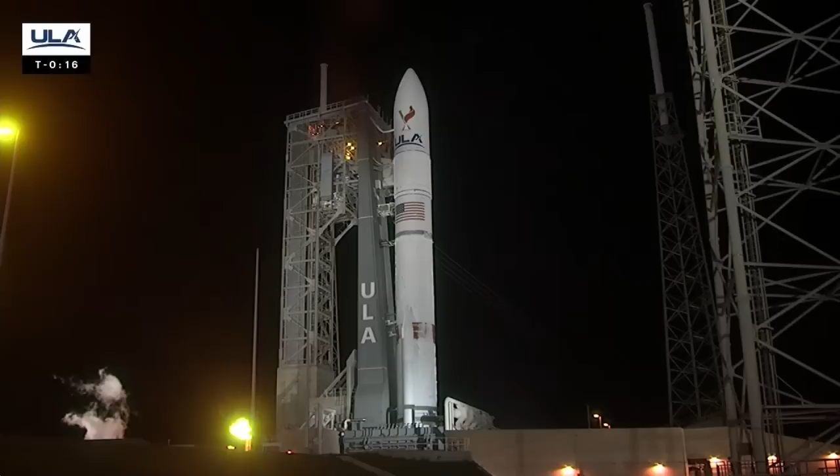Status check. Go Vulcan. Go Centaur. T-minus 10, 9, 8, 7, 6, 5, 4, 3. We have ignition.

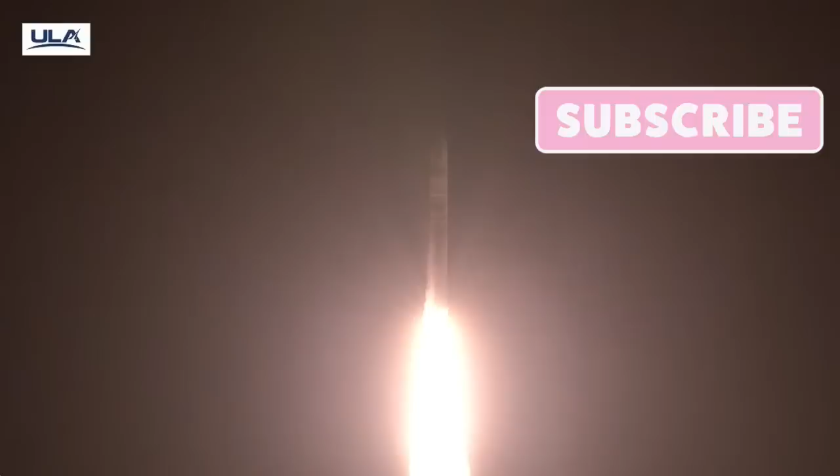Today we are going to discuss the potential of a new rocket system: the Vulcan Centaur rocket system by the United Launch Alliance.

The fuel chosen for the BE-4 is liquefied natural gas. Liquid natural gas is just unrefined methane with a small percentage of other hydrocarbons. Methane is the simplest possible hydrocarbon, having one carbon and 4 hydrogen atoms covalently bonded.

Liquid natural gas is produced from the breakdown of organic matter buried underground. If you have heat and pressure for very long without oxygen, complex molecules will break down to simpler forms over time. Two of these forms on their way to natural gas are coal and oil. Where you have coal or oil, you will have some natural gas. Over enough time, almost all the carbon-rich materials would break down, producing smaller and smaller hydrocarbons, until it was mostly methane.

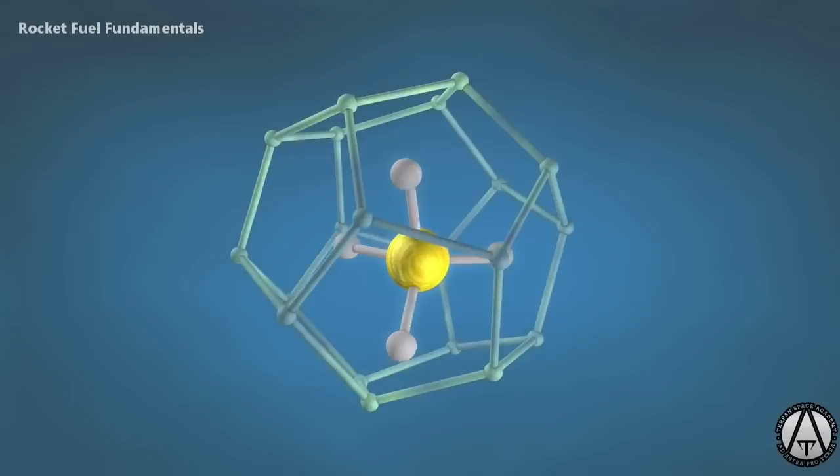Bacteria on Earth and possibly Mars can also produce methane. These bacteria live where there is little to no oxygen, and break down organic matter or other chemicals into what we usually call swamp gas. This is mostly methane. All organic waste can be converted into methane and other biogas, including hydrogen.

This can be done by organisms or chemical processes. While organisms turn complex molecules directly into methane, chemical breakdown is usually a step-by-step process. The next simplest hydrocarbon after methane is ethane. Then propane, butane, pentane, hexane, heptane, and octane.

You may recognize octane. We call this fuel gasoline because a gentleman in London named John Cassell advertised his patent Cazeline oil, which burned bright and brilliant in lanterns, and was cleaner burning than the kerosene fuel that was commonly used in lanterns at the time.

Kerosene produced a lot of soot, but this gasoline made a lot less. When a shopkeeper named Samuel Boyd started using the same name for a liquid fuel he was selling, he received a nasty letter telling him he could not use the trademark name Cazeline. Mr. Boyd changed the C to a G and started selling Gazeline.

By 1863 in Britain, this was called gasoline and spelled this way. And the next year it started being sold in America with a slightly modified spelling. What made gasoline burn cleaner than kerosene?

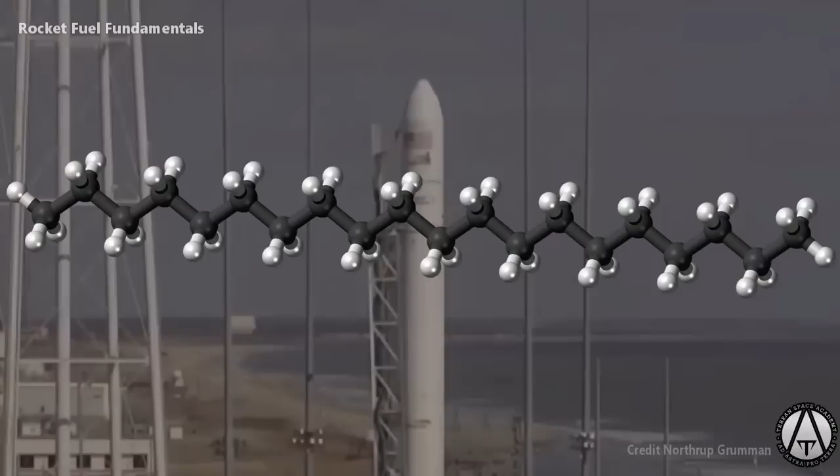This is kerosene. This is what the Falcon 9, Soyuz, Delta III, Atlas, Antares, Astra, Rocket Lab Electron, and Firefly Alpha all burn. Kerosene refined and purified for rocket use is called RP1. Just like purified methane is more predictable but more expensive than natural gas, purified kerosene, with one known molecule, is more predictable but more expensive than plain kerosene.

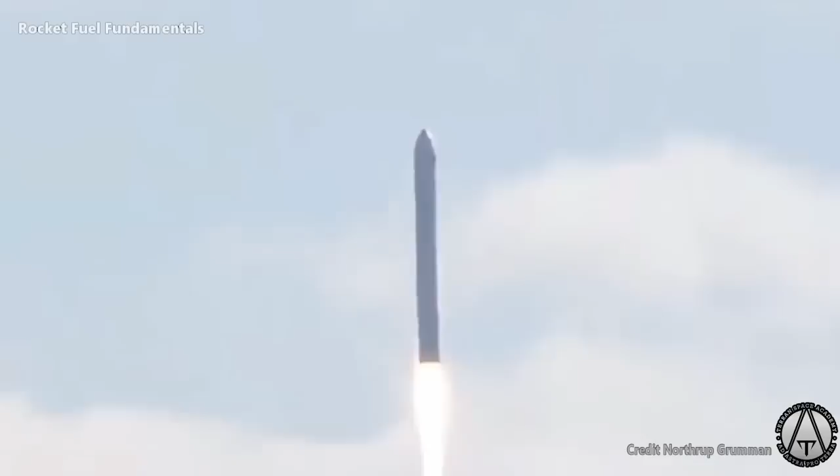But RP1 still burns into many complex products of combustion. From kerosene, you could make lots of breakdown products, and it is very hard to get anything to burn perfectly. The fuel and oxidizer also need to be in the gaseous state for the molecules to mix properly and combust when they go into the combustion chamber.

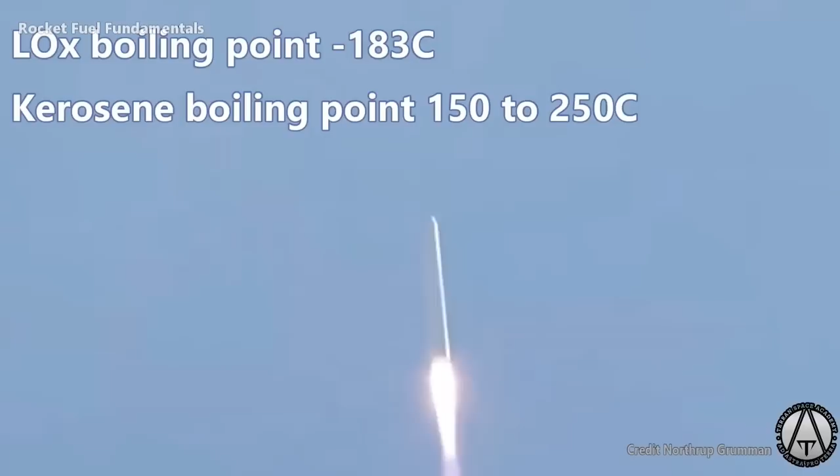Turning into a gas is no problem for liquid oxygen, which has a boiling point of minus 183 Celsius. But kerosene has a boiling point of 150 to 250 Celsius, depending on multiple factors. That means before the RP1 rocket engine is burning, the heat is lower and not much of the RP1 is gas. This makes RP1 rockets harder to start.

The boiling point of methane is minus 161.5 Celsius, much closer to that of liquid oxygen, allowing them to have a common dome.

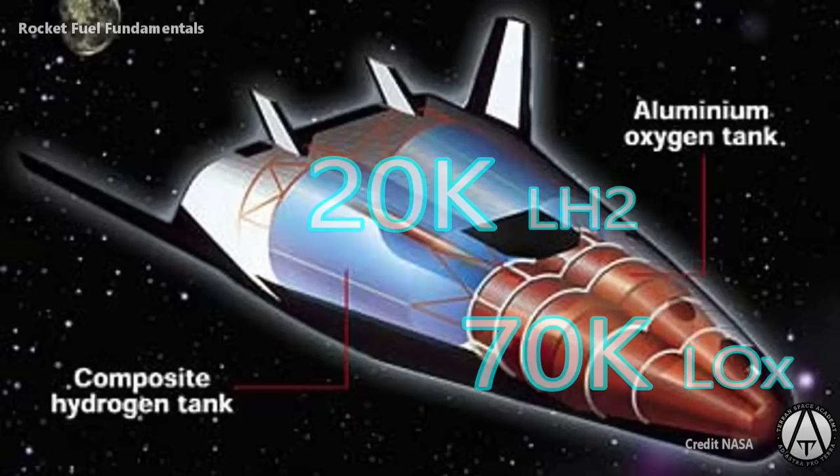Liquid hydrogen is much colder than liquid oxygen, so you need separate tanks or insulation to prevent the oxygen from heating your hydrogen in that case, and causing too much boil-off. Both methane and hydrogen gasify far below room temperature, making combustion of these gases in a rocket engine much easier.

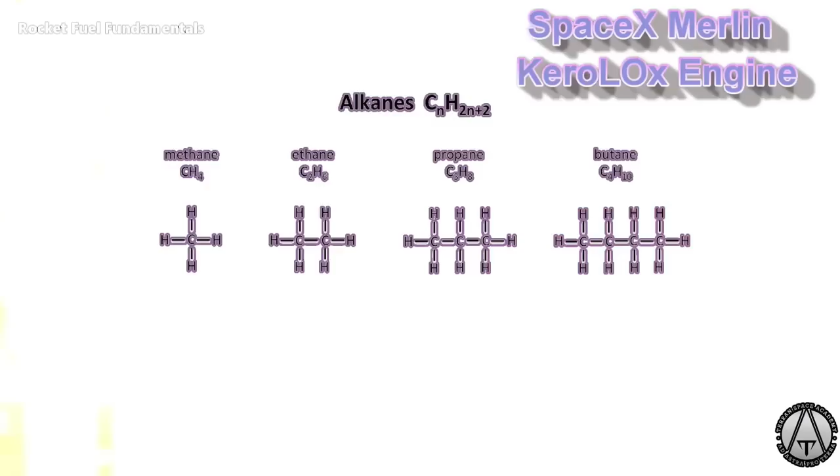Let's look at why this is. It turns out that all of these hydrocarbons stick together, using van der Waals forces, while the hydrocarbons are themselves electrically neutral. When electrons are orbiting two or more atoms, the electron won't be everywhere at once. When its probability wave is distributed more on one side, that side will have a larger negative charge than the other side, which will have a higher positive charge.

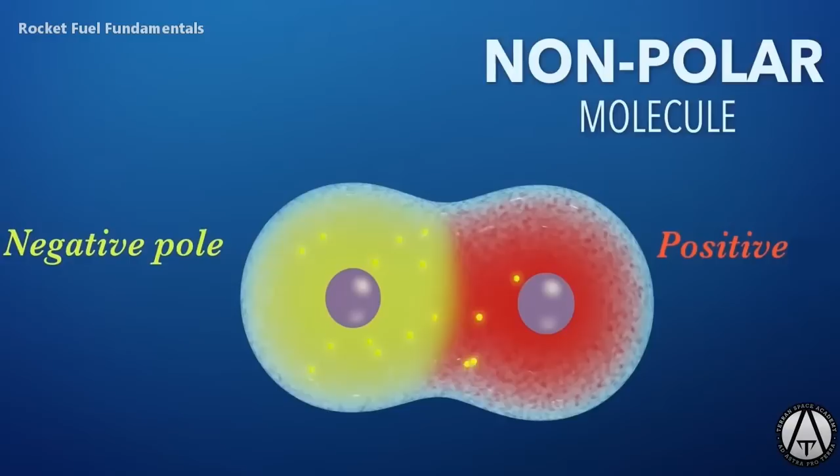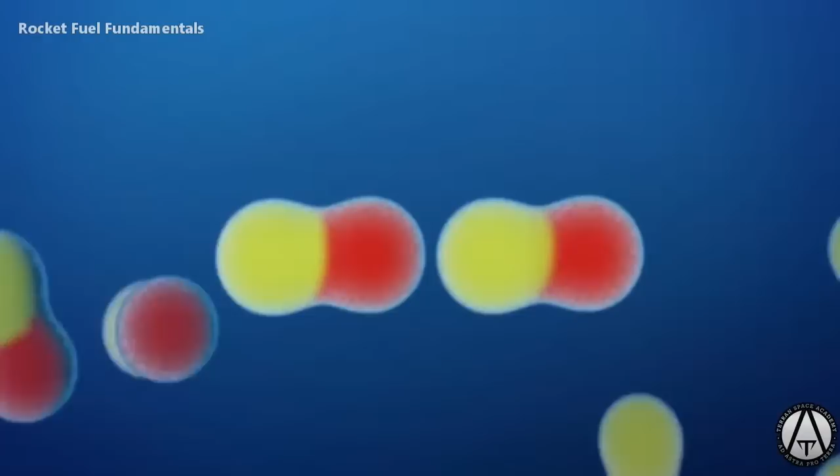If two molecules are next to each other, these very small charges will cause them to briefly attract each other, causing these molecules to stick together like magnets. Since all of these molecules are passing in and out of these phases, van der Waals forces can hold them together. This is a very weak force, but the longer a hydrocarbon molecule is, the stronger this force becomes.

If the molecule is very long, it will become a solid at room temperature and be called wax. As the molecule gets smaller, it will be liquid at room temperature, like gasoline and kerosene. And finally, if the molecule is short enough, it will be a gas at room temperature, like butane, propane, ethane,

and methane. Natural gas was used in public lighting for a long time, and while it burns cleaner than gasoline or kerosene, a gas or cryogenic liquid would be hard to get into your car. So we use the liquids gasoline or kerosene in most of our transportation.

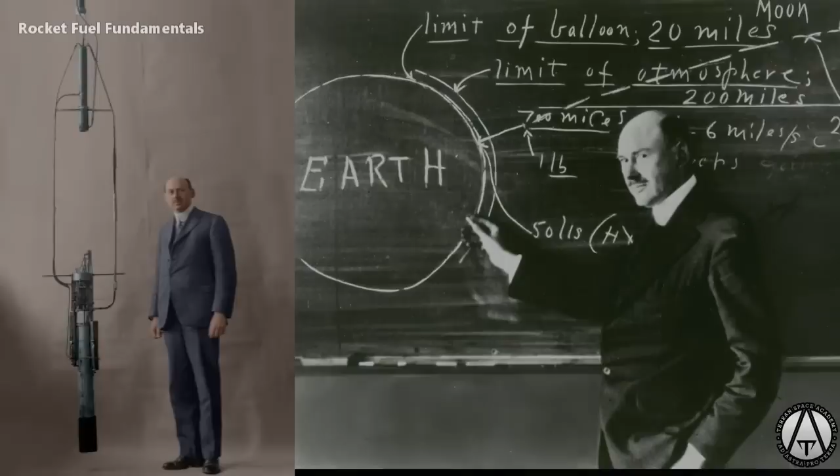There have even been gasoline-fueled rockets. These were built and tested by Robert Goddard himself, the father of American rocketry. And kerosene is used for jet fuel, so it was easily available. Kerosene is denser than gasoline, giving more energy by volume.

Remember that energy density is measured in energy per volume, joules per cubic meter, for example, while specific energy is measured in joules per kilogram. Specific in this context means by mass. Density measures a characteristic, like mass, by volume. So energy density measures the stored energy in a substance by volume.

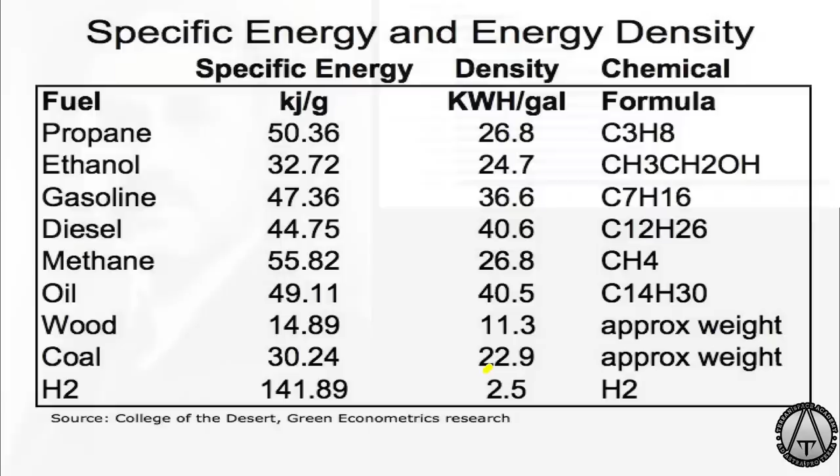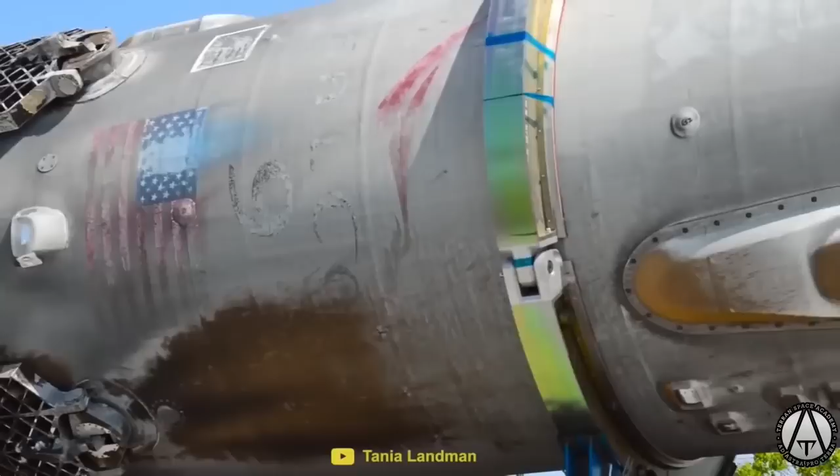Mr. Goddard had stated long ago that while hydrogen had the highest specific energy, measured in joules per kilogram, of any rocket fuel, it also has a very low energy density, measured in joules per unit volume. This means that you need really big tanks if you use hydrogen fuel. Kerosene has a much higher energy density, allowing for smaller tanks. But with its lower specific energy, you don't get as much energy out of each kilogram.

Mr. Goddard thought that methane would be a nice balance between these two. But methane was harder to get and use in his time. Let's look at another quality of kerosene.

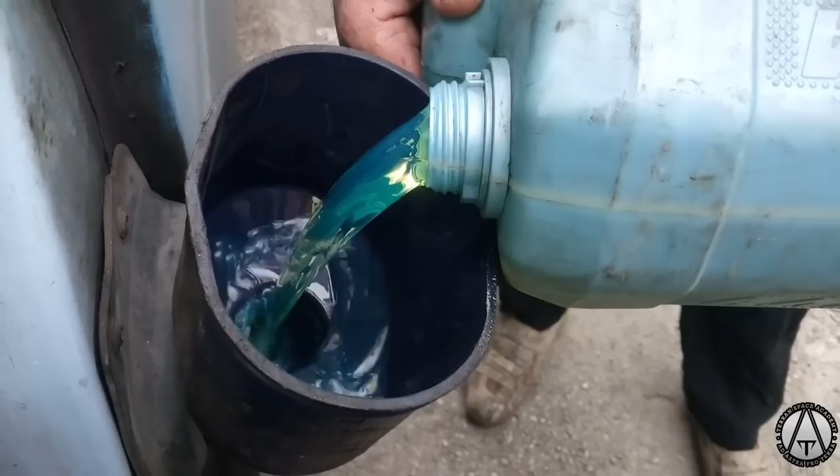Kerosene, with its higher energy density, is both easier to store and easier to pump. A pump can hold a certain volume of liquid at any time. A centrifugal pump spins to move that liquid. The faster it spins, the more liquid it can move.

If you had 3 pumps, all the same size, and spinning the same speed, you could move a lot more kilograms of kerosene than you could the less dense liquid methane or liquid hydrogen. You could spin the methane and hydrogen pumps faster, but pumps have limits to how fast they can spin. These limits have to do with the G-forces produced at the end of the blades.

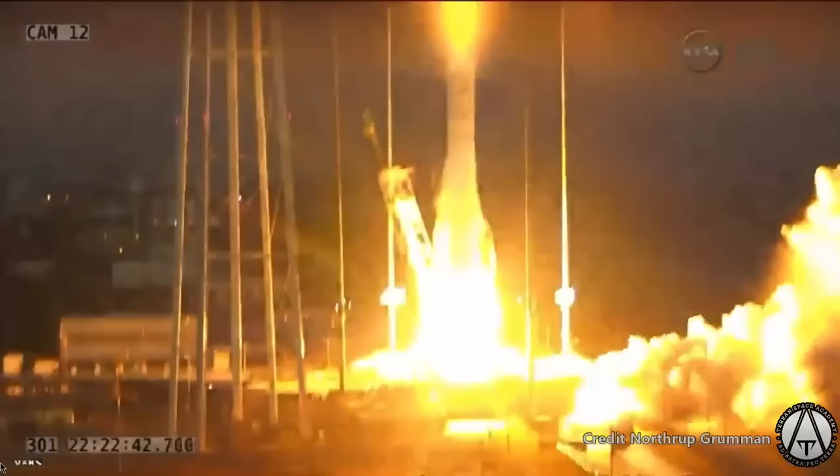These forces can warp or crack blades, causing failures, like in this Antares rocket that exploded shortly after launch, when a turbopump failed and blew itself apart. This is a kerosene or RP-1 explosion.

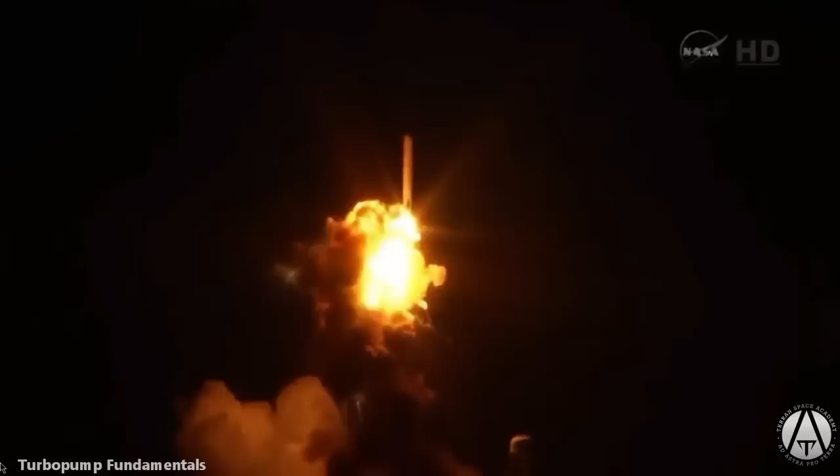In order to pump the same amount of kilograms and not spin too fast, the turbopumps for methane would need to be larger, so they move a greater volume with each rotation. This is how big the turbopump was on the F1 RP-1 burning Saturn V engine. Compare the RP-1 pump to the liquid oxygen pump.

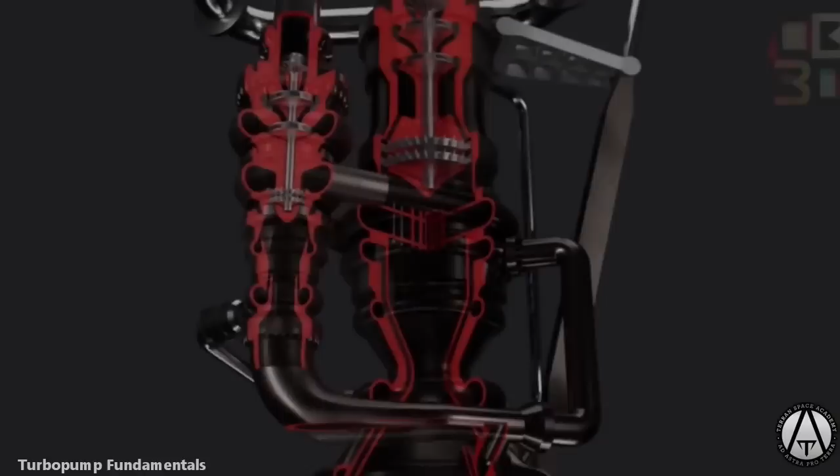Now this is the relative size of the Space Shuttle main engine pumps, burning liquid hydrogen and liquid oxygen. Hydrogen's low density is why this pump had to be so large. Here is the Raptor, showing the relative size of the methane and oxygen pumps. That's one reason why you can't just run methane through a Merlin engine. The engine would be fuel-starved because it was designed to move the more dense RP-1.

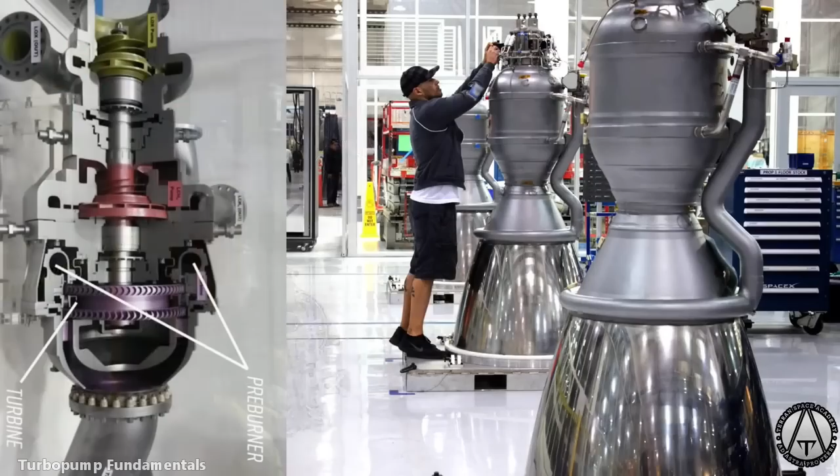There is another issue with RP-1. Due to its higher boiling point, it doesn't turn into a gas and evaporate as easily, reducing explosion risk. But this high boiling point also makes it harder to turn into a gas and ignite, since liquid hydrocarbons can't burn until they turn into a gas.

Gasoline and diesel engines will sometimes have a swirl chamber to heat and gasify the fuel before it is injected into the cylinder for combustion, to increase efficiency and improve ignition. Let's look at ignition briefly.

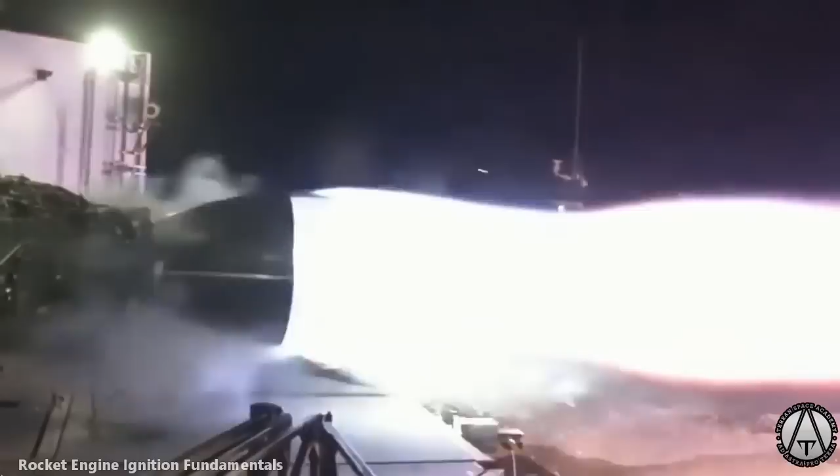For every combination of fuel and oxygen, there is a different temperature of ignition. While a tiny spark might ignite natural gas, it takes a lot of heat to start kerosene burning. If you put diesel fuel in your gasoline engine, it will quit working.

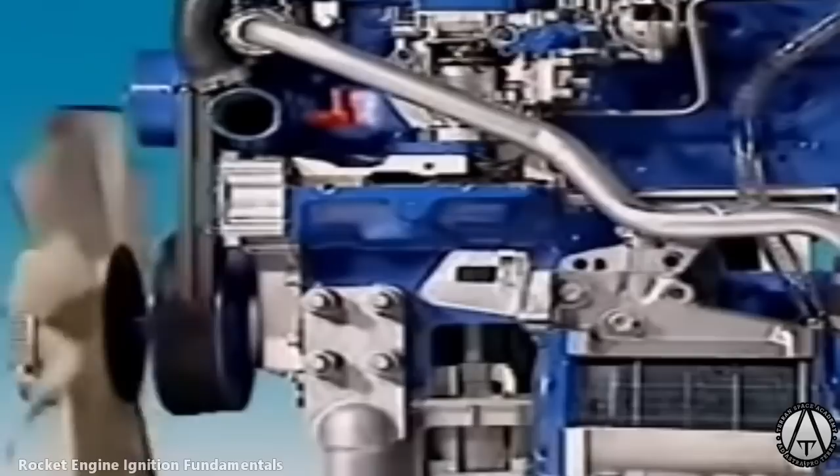This seems strange, since we said that kerosene has more energy per kilogram than gasoline. But kerosene doesn't gasify as easily as gasoline, and a liquid hydrocarbon can extinguish a flame or ignore a spark. The spark plugs in a gasoline engine do not generate enough heat to gasify and ignite diesel kerosene fuel to cause ignition and create combustion.

A diesel engine will use very high compression and glow plugs to get started. Remember that compressing something causes it to heat up. That is why a diesel engine does not have spark plugs. Once the glow plugs help start the engine and get the pistons moving, compression alone is used to heat the fuel and oxygen to combustion, causing it to auto-ignite once the engine is running.

To get RP1 to ignite and combust in a rocket engine, it needs to be started with a very high temperature. Most engines use chemicals that explode on contact with oxygen to light their RP1 engines. There is more on how to light engines in this lesson.

These chemicals are usually triethyl aluminum and triethyl borane, usually abbreviated TEA-TEB. This burns green and is why you see a glow when they start an RP1 engine. Here you see a Falcon 9, a Rocket Lab Electron, and a Firefly Alpha.

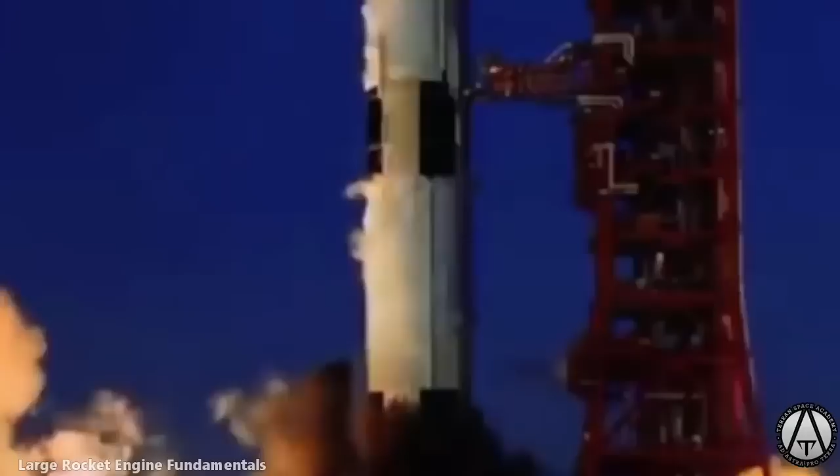The largest RP1 rocket engine ever flown was the F-1 engine by Rocketdyne. Let's look at the development of this engine for a minute. In 1955, the Rocketdyne Company was chosen to start working on a large rocket engine for the Air Force. The Air Force wanted a powerful engine for two-stage ICBMs.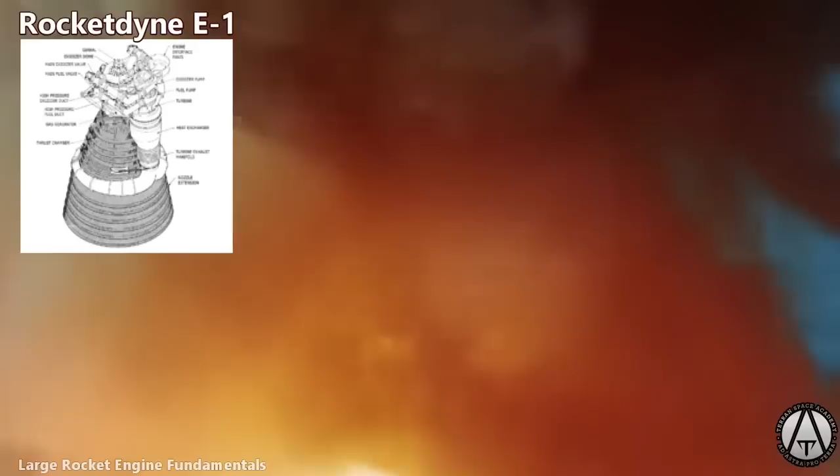The first engine designed was called the E-1 engine. The E-1 was a large RP-1 burning gas generator engine. This engine was built and tested, but like all large engines, it had to contend with combustion instability. When a combustion chamber gets large, there may be areas that burn at different rates. This can cause explosion-like detonations and shockwaves that can damage your engine or blow it apart.

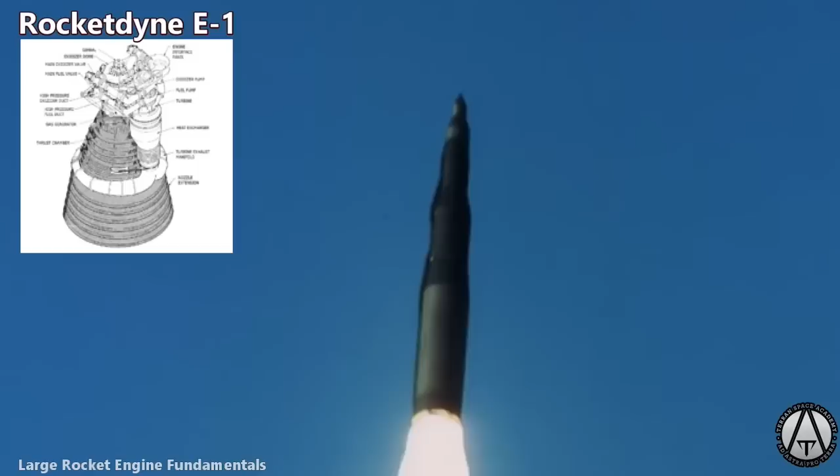While Rocketdyne was trying to solve this issue, Aerojet had designed and tested the LR-87. The LR-87 had two separate turbopumps and combustion chambers, really making it a dual-engine system, but it was considered as a unit, and the Air Force chose it over the E-1 for the Titan missile. The E-1 was shelved, but Wernher von Braun thought that a larger version, the F-1, could be a good choice for a moon rocket, if the combustion instabilities could be solved.

The Soviets had the same problem trying to make large rocket engines, and they had the same solution as Aerojet: make multiple small combustion chambers and nozzles. The RD-170 has one turbopump and 4 combustion chambers and nozzles. The RD-180 is just 2 of these chambers with 1 turbopump. Because they have 1 turbopump, they are considered one engine.

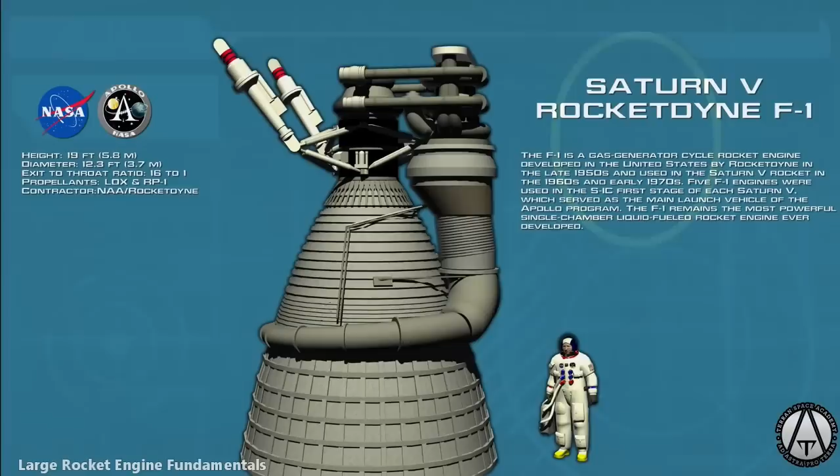For the F-1 engine, Rocketdyne found it could put these dividers into the top of the combustion chamber and solve this problem. Other problems were solved also.

When we burn some fuel in a gas generator to use in the turbopump, we usually keep it fuel-rich, so as not to overheat the preburner and turbine. The exhaust from this preburner can then be fed into the nozzle partway down to protect the nozzle with a cooler layer of gas. You can see this dark gas exiting here on an F-1.

You can also pump fuel around the rocket nozzle to keep it cool. RP-1 can do this for a while, but heating and cooling RP-1 can produce long carbon chains that make plastic-like residue buildup. This is called polymerization. This is not really as much of a problem with methane-based engines.

RP-1 also does not burn completely in a rocket engine and forms soot. This can start to block up the engine and is called coking. This is also not as much of an issue with methane and natural gas.

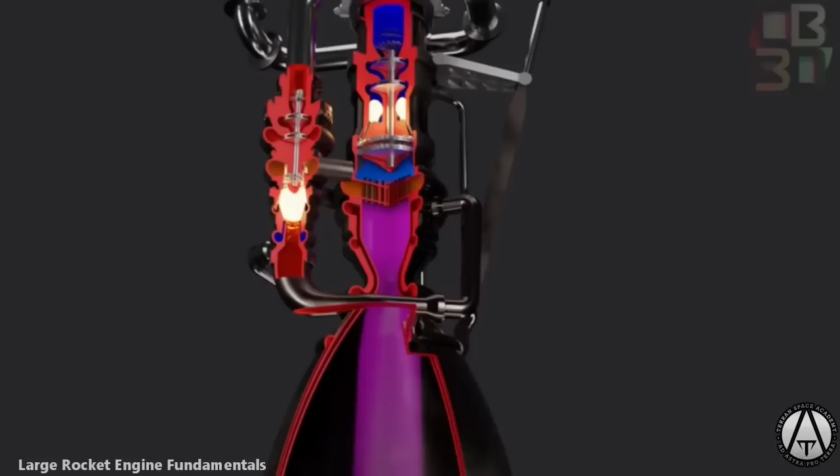But while the RP-1 burning F-1 was not reusable, the RP-1 burning SpaceX Merlin engine is. SpaceX must clean and refurbish the Merlin engines between launches. One of the ways these engines are cleaned is with high-pressure nitrogen gas.

They had been cleaned with alcohol, but alcohol residue had caused an engine shutdown on one flight, and I don't think they use this anymore.

The BE-4 will be using liquid natural gas, which, being mostly methane, burns much cleaner. The BE-4 is a much larger engine than the Raptor. You can see here that the combustion chamber is much larger.

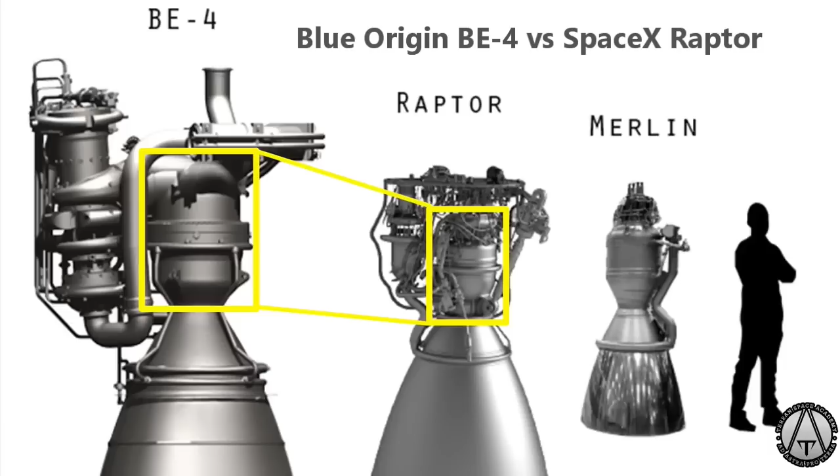It is very likely that early on the BE-4 suffered from combustion instability. If this was one of the problems, we'd have to assume the very smart people working on the BE-4 know about past solutions. Going to multiple combustion chambers would mean starting over completely. So whether they use dividers or some other solution, I don't think this would hold the engineers back long.

Why doesn't the Raptor have this problem? Because SpaceX went a different route. The Raptor combustion chamber is much smaller than the BE-4's. And while the BE-4 is supposed to be more powerful than the Raptor 2, at 230 tons of thrust, it's very close to the 240 tons that the Blue Engine 4 is supposed to produce. How is this possible? Let's look at what's the same and what's different on these engines.

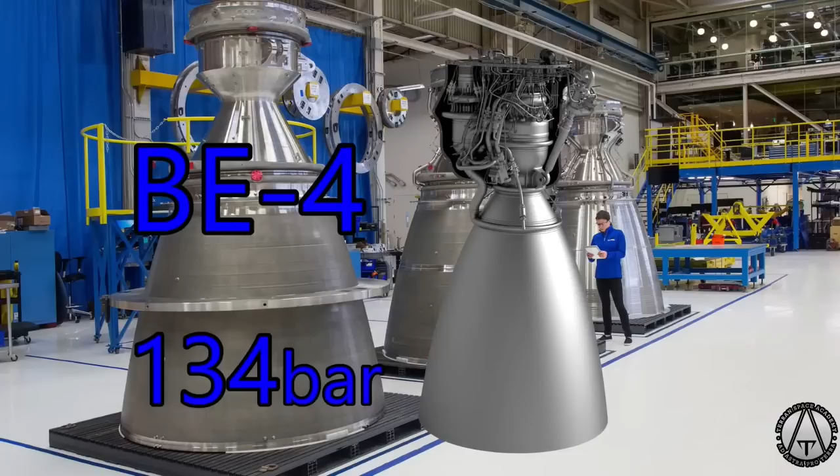Both these engines are burning methane-based fuel. But while the BE-4 has a large combustion chamber, running at about 134 bar, the Raptor, despite its smaller combustion chamber volume, is running at more than twice that, 300 bar, and has been tested to 330. By using extreme pressure, you can make your engine more efficient.

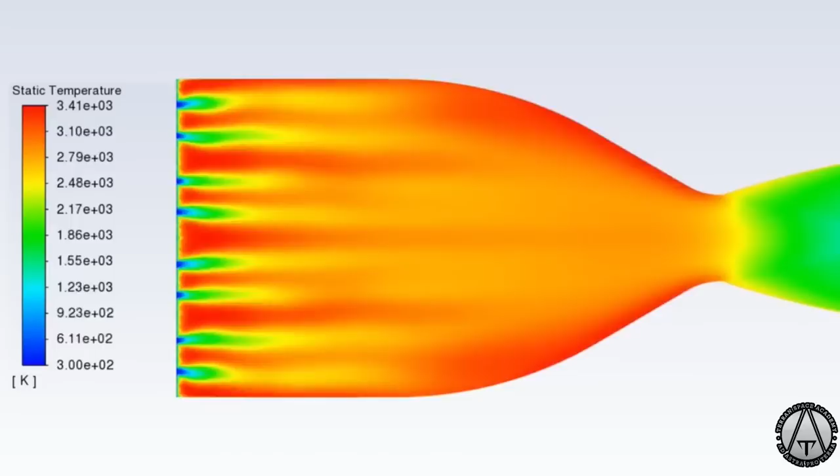Just like the diesel car engine, compression improves combustion because it squeezes the reacting gas molecules together, making it easier for them to react. This reduces residence time. Residence time is how long the propellant must be in the combustion chamber to have time to react and combust. A shorter residence time means you can pump the propellant through at a much faster rate and still get near complete combustion. Why didn't everyone do this?

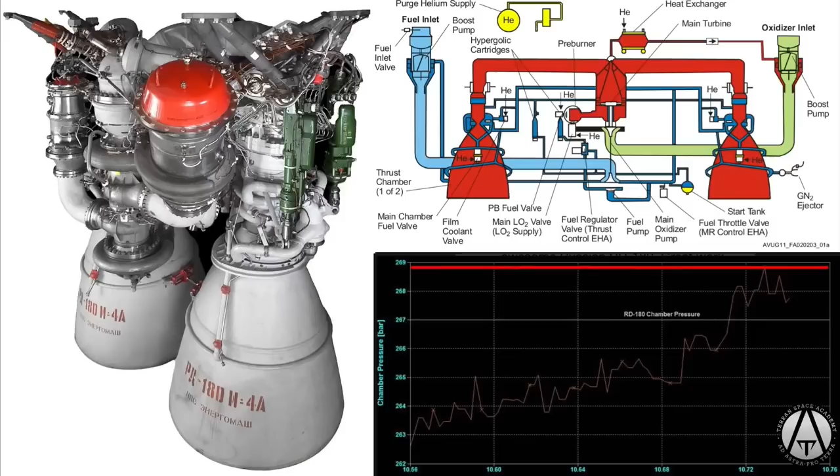Because you'll blow your combustion chamber apart. The highest combustion chamber pressure of any rocket engine before the Raptor was set by the RD-180, and stood for half a century. To accomplish this, the Soviets developed special alloys that could withstand the heat and pressure. SpaceX improved on these, while Blue Origin used an F1-type large, lower-pressure combustion chamber. SpaceX adopted the high chamber pressure approach.

In fact, the chamber and nozzle mass, without turbopumps, of the BE-4 and the Raptor 2, as seen here, are 851 kilograms versus 852 kilograms. How can a much smaller combustion chamber, with a slightly smaller bell nozzle, have as much mass as a much larger one? This one must have a much thicker chamber wall, so it can withstand the ultra-high pressures. A smaller combustion chamber with very high pressure will have a lot less problem with combustion instability and a shorter residence time, allowing propellant to be pumped through faster, increasing thrust.

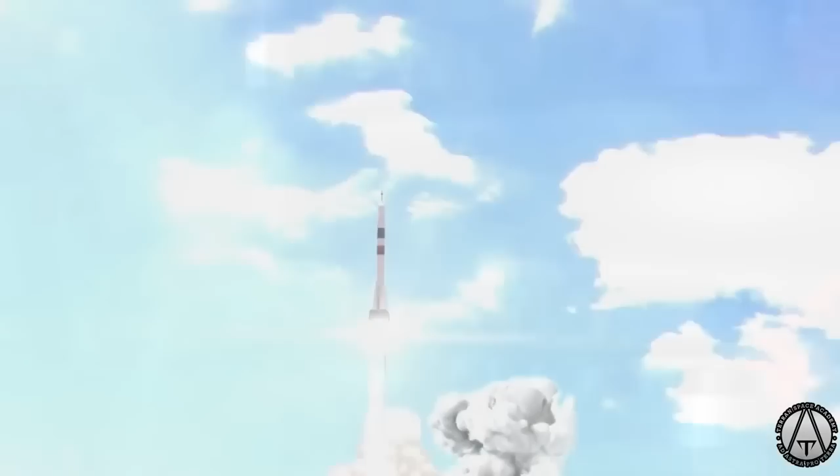And that brings us to the other possible issue. Both of these engines, of course, use turbopump systems. Nothing else can produce the power needed to pump propellant at these rates and pressures. Blue Origin adopted the RD-180 pump cycle, using a single oxygen-rich preburner and a single turbine. This is a staged combustion engine. This worked great for the smaller RD-180.

The Raptor instead uses two preburners, one oxygen-rich for the oxygen side and one fuel-rich for the fuel side. This is called full-flow staged combustion. The Blue Origin turbopump uses just one oxygen-rich preburner to power this one massive pump that moves both the oxygen and the fuel into the combustion chamber.

Now, single turbopumps can be this big. Here is one from the F1 again, but the F1 was pumping kerosene. A methane turbopump the same size would need to spin much faster. And the F1 preburner was fuel-rich, keeping it cool.

The BE-4 is oxygen-rich. Increasing the power in the BE-4 preburner will create tremendous heat and oxidation stress on the turbine blades. You can quickly see that this one pump must work much harder to move an adequate amount of propellant than these two pumps.

To get high performance out of this large turbopump, the conditions here will be much more extreme than what the Raptor turbopumps experience. All preburners are small combustion chambers, with all the same pressure limitations and cooling problems. The Raptor pumps are being constantly bathed in cold methane and liquid oxygen, allowing them to run at a lower temperature. The BE-4 turbine is not. Overheated metal breaks down much more quickly than properly cooled metal.

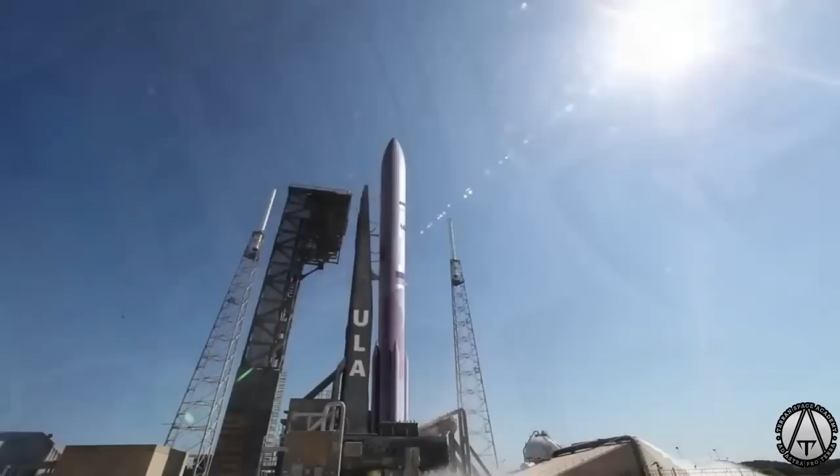Though they may be able to get it to work for a single flight, possibly saving the Vulcan rocket, which is not reusable, I don't think they will easily be able to reuse the BE-4 with this design. And the BE-4 is supposed to be a reusable rocket engine. It is supposed to power the New Glenn through multiple launches and landings. But for a rocket engine to be reusable, you don't want to overstress any components. That is why the Archimedes engine, being designed by Rocket Lab, will not have any extreme performance parameters.

The Vulcan rocket is 200 feet tall and 18 feet in diameter, that's 61 by 5.4 meters for the rest of the world. This is not as tall as the SpaceX Falcon 9, which is 70 meters tall, but it is wider. This gives Vulcan a higher volume than the Falcon 9.

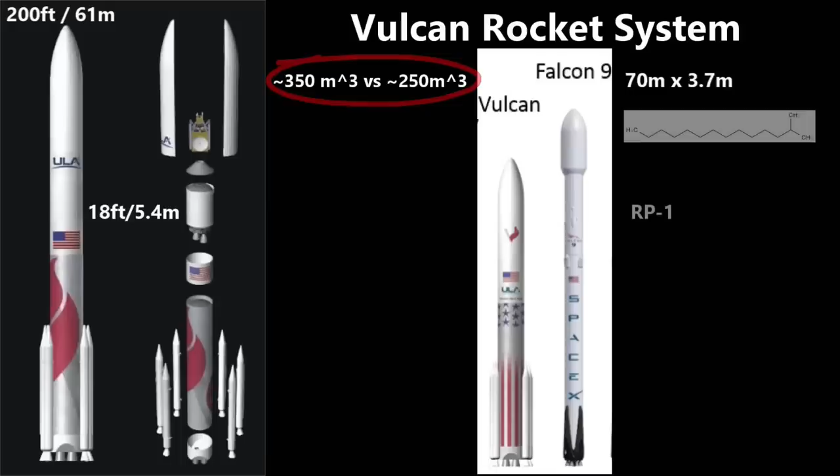The Falcon 9 uses RP-1 for fuel and liquid oxygen for an oxidizer. The Vulcan uses liquid methane and liquid oxygen on the first stage, then liquid hydrogen and liquid oxygen on the Centaur second stage. There will also be the option to add solid rocket propellant boosters to the Vulcan. It can have 0, 2, 4, or 6 of these.

Each SRB can produce a little more than 2,200 kilonewtons of force, burning hydroxyl-terminated polybutadiene that works as a binder and fuel, combined with ammonium perchlorate as an oxidizer, and powdered aluminum both as fuel and to help retain and concentrate heat.

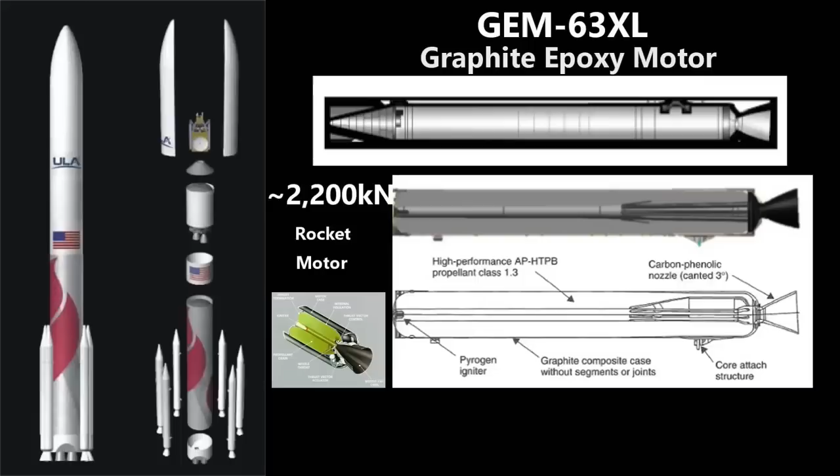This propellant burns through a GEM-63XL rocket motor. GEM stands for Graphite Epoxy Motor. Graphite epoxy is the lightweight composite used for the booster structure. You can learn more about aerospace composites in this lesson.

It is traditional, by the way, to call a solid rocket system a motor rather than an engine. The GEM-63XL was developed by Northrop Grumman and is an extended version of the older GEM-63, first developed by Orbital ATK. The GEM-63XL is currently the world's largest single-piece solid rocket motor.

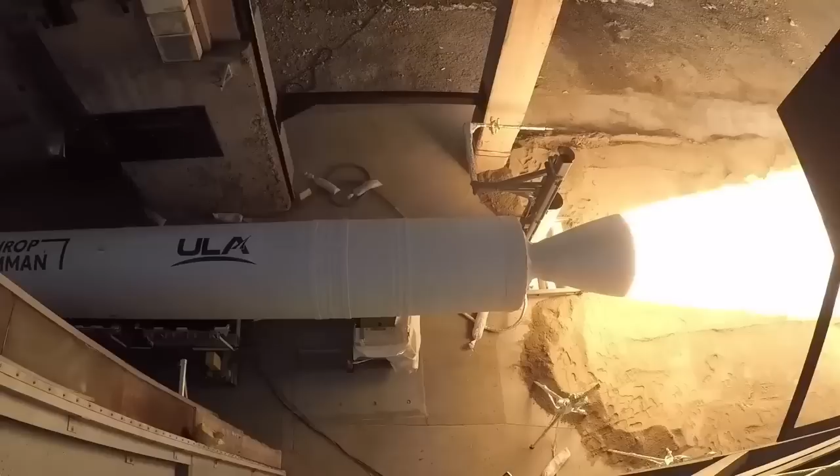It will be 22 meters long and 1.61 meters in diameter. This makes it taller and wider than a Rocket Lab Electron rocket.

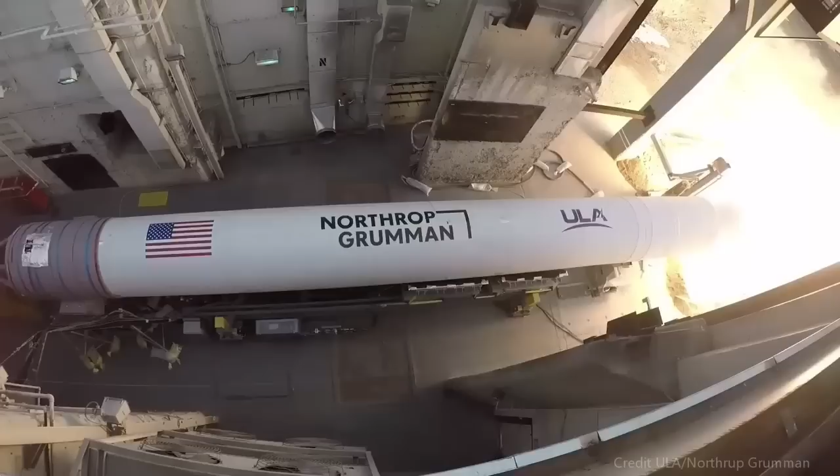Each booster will have a propellant mass of 48,000 kilograms and will burn all of this in the first 84 seconds of flight. We can divide the propellant mass by the burn time, 48,000 kilograms divided by 84 seconds, to get a propellant mass flow of 571 kilograms per second.

But this is the average propellant flow. As a solid rocket motor burns, the geometry of the thrust core changes. This geometry can be designed to create a high thrust start and a low thrust finish, to keep the rocket from experiencing too much G-force.

We can find the maximum propellant mass flow if we want to. We know that we can convert specific impulse to exhaust velocity. The specific impulse of the booster is given as 280 seconds. In vacuum, a specific impulse of 280 seconds multiplied by the force of gravity on Earth, 9.807 meters per second squared, gives us an exhaust velocity of 2,746 meters per second.

The maximum thrust of the GEM-63XL was given as 2,200 kilonewtons. We know that thrust equals exhaust velocity times mass propellant flow, and we can switch that around to mass propellant flow equals thrust divided by exhaust velocity. That would be 2,200,000 newtons divided by 2,746 meters per second, giving us a maximum mass propellant flow of about 800 kilograms per second.

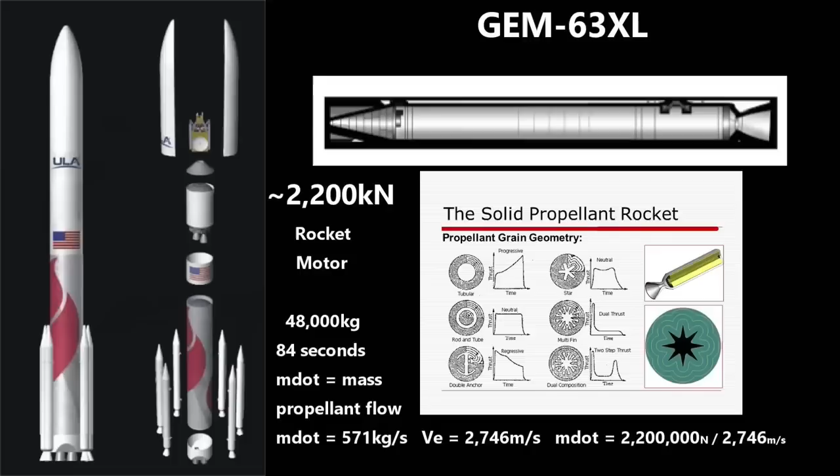Now we move to the first stage. The first stage of the Vulcan rocket is 5.4 meters or 18 feet in diameter, and 33 meters long, which is 109 feet. It was designed with technology evolved from the Atlas V and Delta IV rockets.

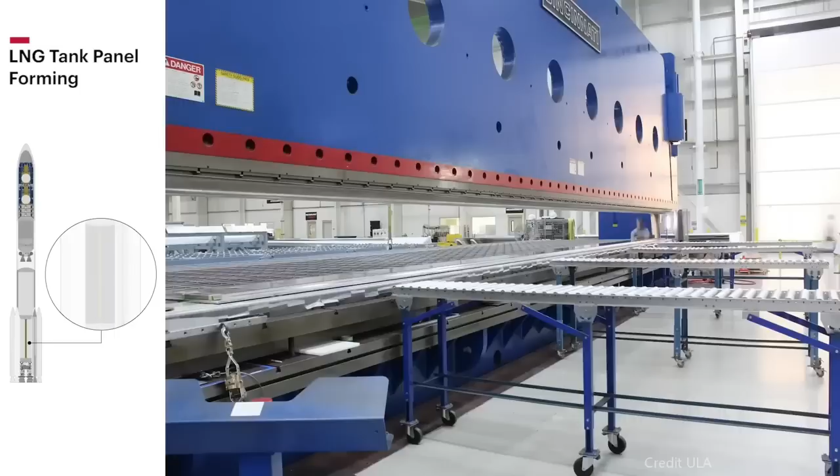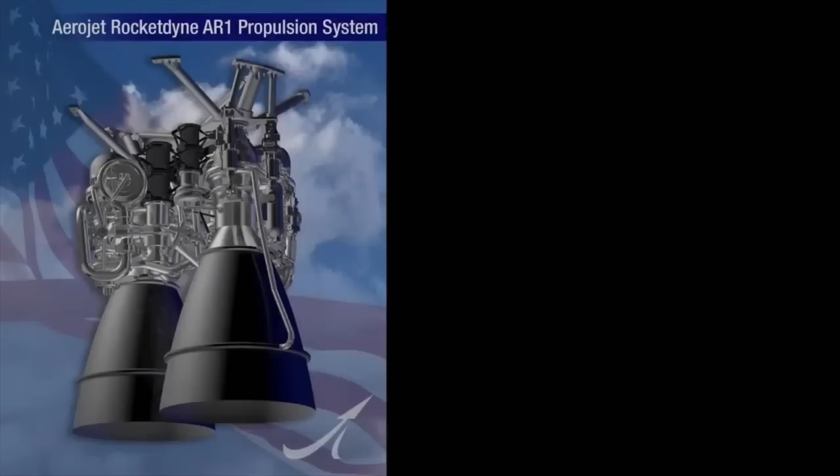The first stage is planned to burn liquid methane and liquid oxygen through a Blue Origin BE-4. ULA had considered the Aerojet Rocketdyne AR-1 instead of the BE-4. But the AR-1 does not use methane, it burns RP-1 instead. The AR-1 produces 2,200 kilonewtons of thrust, a little less than the 2,400 kilonewtons of the BE-4.

The BE-4 was chosen instead, and Rocketdyne was negotiating with Firefly Aerospace to use the AR-1 on their planned beta launcher. You can learn more about Firefly in this lesson.

Rocketdyne had spent nearly $86 million on the AR-1, and the U.S. Air Force had spent $295 million.

The AR-1 is an oxygen-rich staged combustion engine, like the RD-180 and the BE-4. It does, in fact, look a lot like the RD-180, with 2 combustion chambers and 2 nozzles per turbopump.

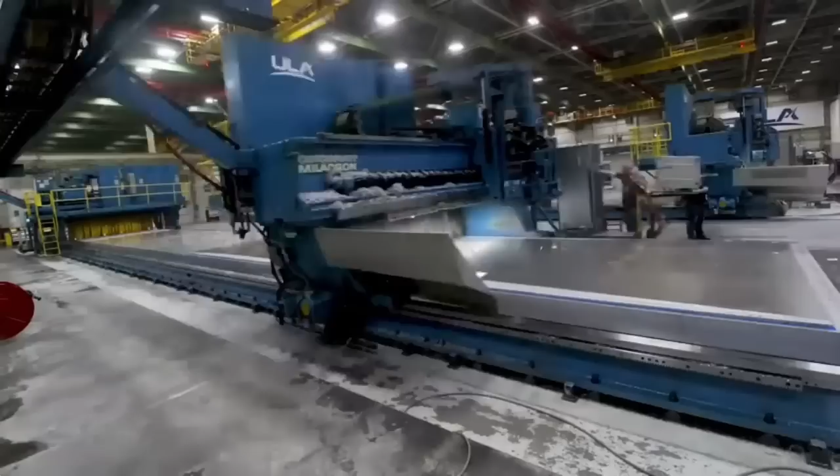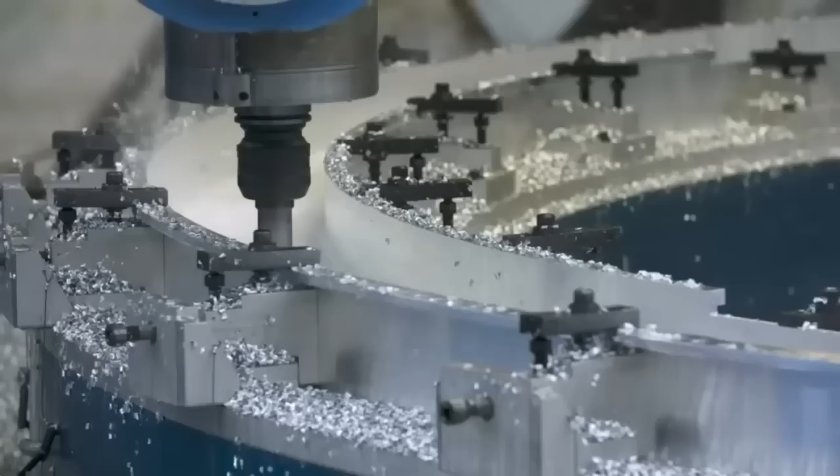Looking back to the Vulcan first stage, these tanks are made from orthogrid aluminum barrels and spun-formed aluminum domes. Orthogrids are created by creating a thicker sheet of aluminum, then milling away everything except grid supports in the thinner wall. Spun-formed aluminum is where a metal disc is attached to a motor, then spun at high speed while tools help shape the final product.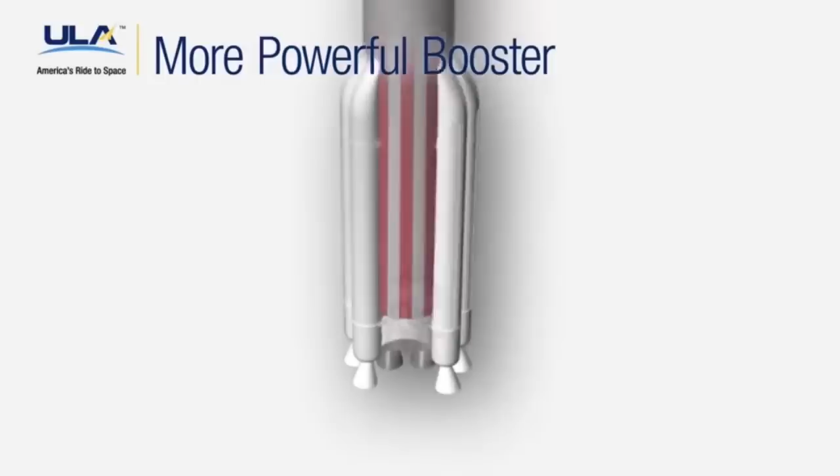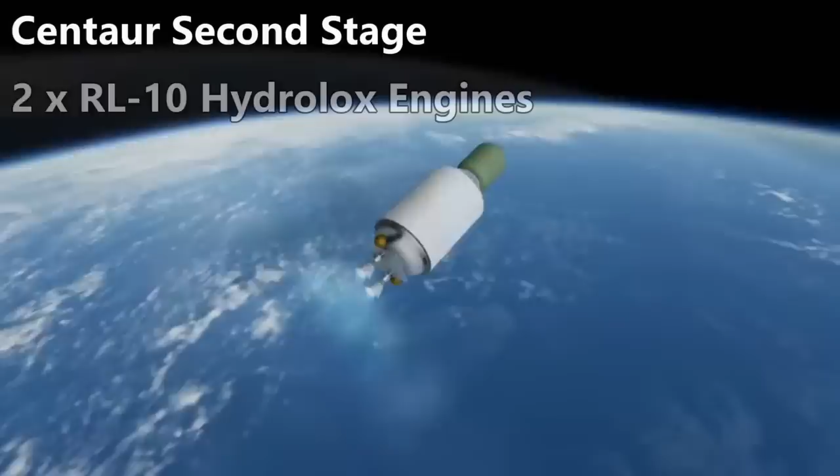The second stage of the Vulcan rocket will be an RL-10-powered Centaur system. This is one of the most efficient and capable second-stage systems in operation. The Centaur is also 5.4 meters in diameter, which is 18 feet, and 11.7 meters tall, 38.5 feet. It can hold a little more than 54,500 kilograms of liquid oxygen and liquid hydrogen. These are separated by a common dome, made of two domes of thin steel, separated by a fiberglass honeycomb insulator.

The cryogenic liquid oxygen and hydrogen will burn through the most efficient rocket engines in existence today. The RL-10 has been perfected over decades. The RL-10 was the first liquid hydrogen rocket engine built in the United States. It was first built by Pratt & Whitney at the Marshall Space Flight Center in the 1950s, and first launched in 1963, in a two-engine configuration as the second stage of an Atlas rocket.

These were RL-10A3 versions. The Saturn I medium-lift rocket used 6 of these engines, and the McDonnell Douglas DCX used 4 of them.

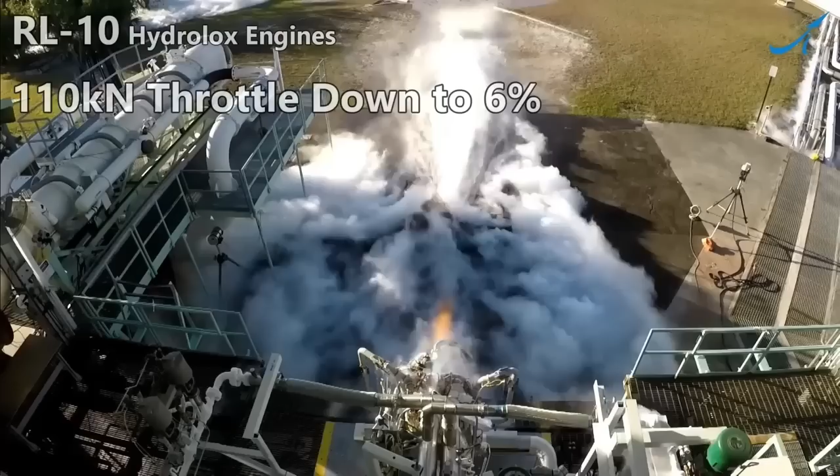The RL series are expander cycle engines that produce 110 kilonewtons of thrust and can be throttled down to very low levels. An RL-10 version, called the Common Extensible Cryogenic Engine, was able to throttle down to only 6% full thrust. The Vulcan will use the RL-10C version, upgrading to an RL-10CX, which will have nozzle extensions when development is completed.

Interestingly, the Centaur second stage is made of 301 stainless steel, just like the Starship.

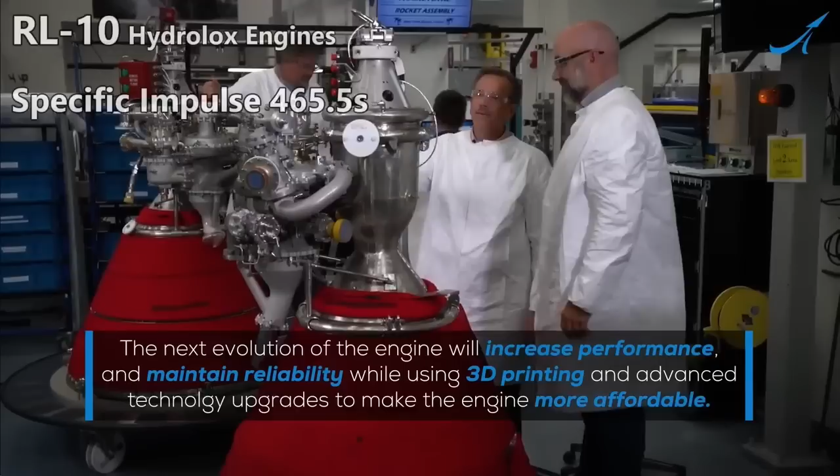The RL-10C21 Hydrolox rocket engine has a specific impulse of 465.5 seconds. That is the best it gets for chemical rockets so far. The RL-10C21 is the master of chemical rocket engine efficiency. The Vulcan Centaur second stage will use the 454-second specific impulse RL-10 version, sacrificing a little efficiency for increased thrust.

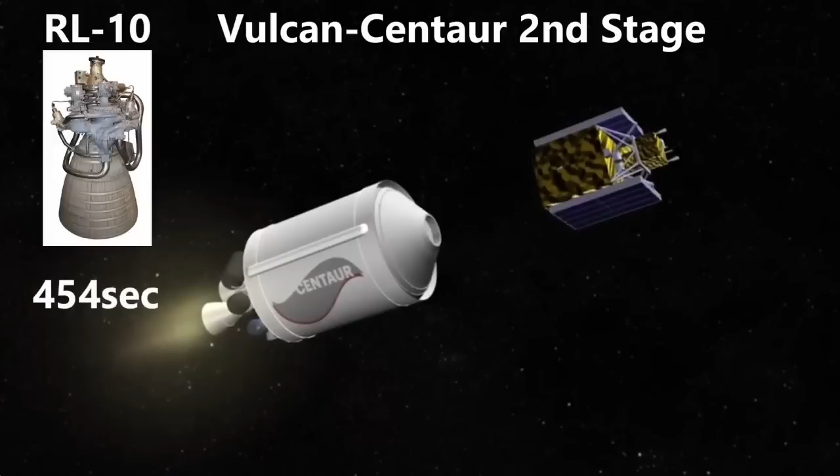We can convert the specific impulse to exhaust velocity. 454 times 9.807 equals 4,452 meters per second.

The Vulcan Centaur second stage will be the larger Centaur 5 version. The average Centaur second stage only holds a little less than 21,000 kilograms of propellant and has a dry mass of 2,462 kilograms in the two-engine configuration.

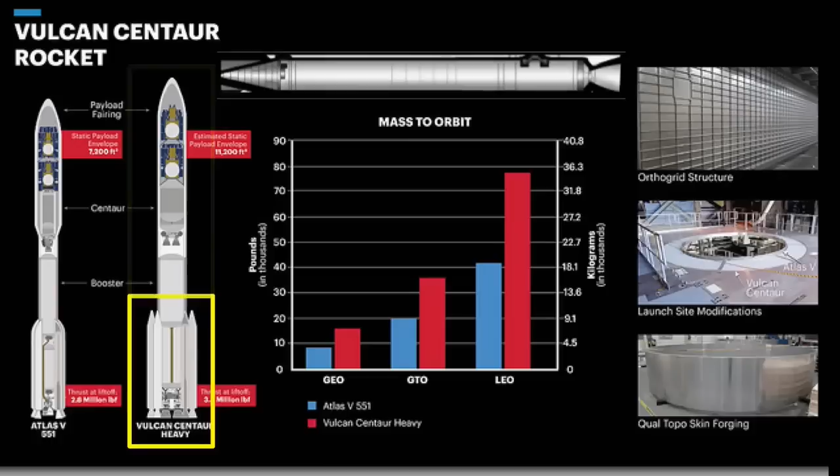The Vulcan rocket can also be built in a Vulcan Centaur heavy configuration. This will have 6 SRB boosters and the new RL-10CX engines with nozzle extensions. This rocket will be able to get 27.2 metric tons to low Earth orbit, and 26,200 up to the ISS, 14,400 to geosynchronous transfer orbit. That means it's thrown out to geosynchronous distance, and then the engines fire again to circularize the orbit. And finally, 13 tons to a translunar injection.

The Vulcan Centaur will cost between $82 and $200 million per flight. As of 2022, the Falcon 9 was flying at $67 million. A non-reusable Falcon Heavy would have a cost of $150 million and a reusable one of $90 million, and can get up to 63,800 kilograms to low Earth orbit.

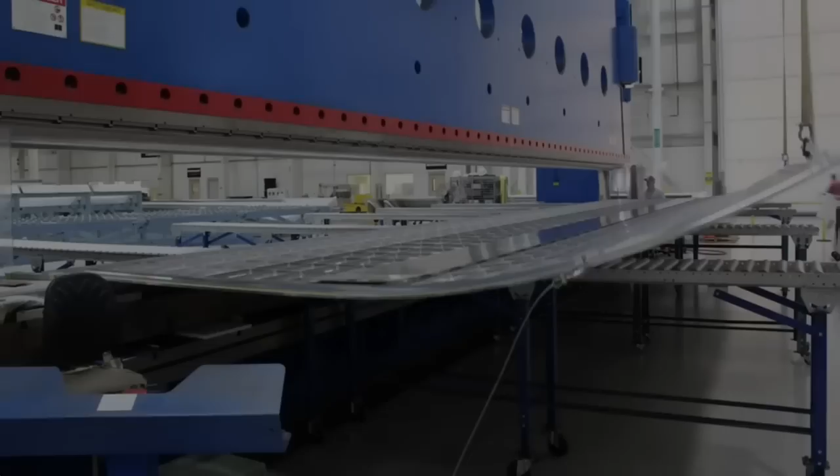I don't know why ULA is working so hard to build something that can't compete with what's already on the market. Why doesn't anyone plan to build something bigger than Starship?